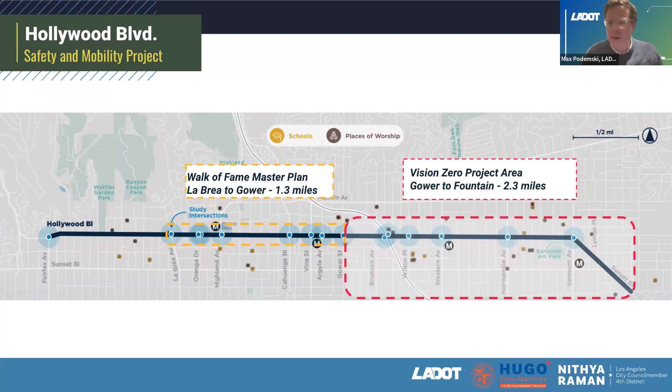So as I mentioned, Hollywood Boulevard was designated one of our priority corridors in 2019. And beginning that year, we started installing initial safety improvements. This project began in August of 2023. And since then, we've been out in the community performing outreach, which has culminated in tonight's town hall, where we're going to show a conceptual design for the street.

And then moving forward, we are going to continue to collect feedback on this conceptual design. And in the summer, our goal is to share a final design and then prepare the community for implementation.

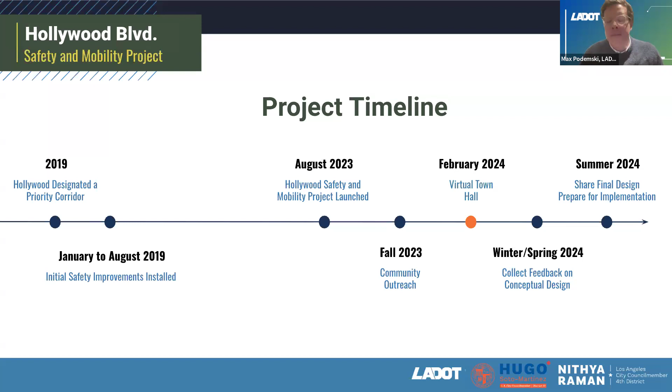So the reason we're focusing on Hollywood and focusing on this project is because there's been a high rate of people being killed or severely injured from traffic crashes. About 56 people killed or severely injured between 2010 and 2019. And as many of you know, Hollywood is a very dense and congested street. There's lots of pedestrians, there's lots of cyclists, there's lots of transit riders, and there's also lots of vehicles, and many of these vehicles are going at high rates of speed.

So between Normandie and Kingsley, about 30% of cars are exceeding the speed limit. And that combination really results in a high degree of people getting killed or severely injured, and about 60% of those killed or severely injured between 2010 and 2019 were either walking or biking.

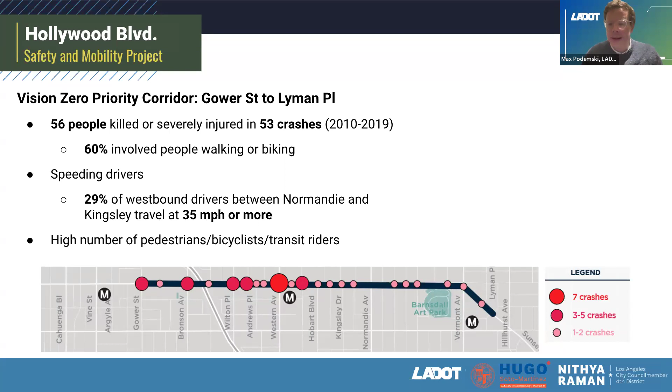As I mentioned, we have installed some initial safety improvements on Hollywood. This includes continental crosswalks, left turn calming treatments, and we also installed rapid flashing beacons at several intersections. These are flashing yellow lights that help pedestrians cross the street.

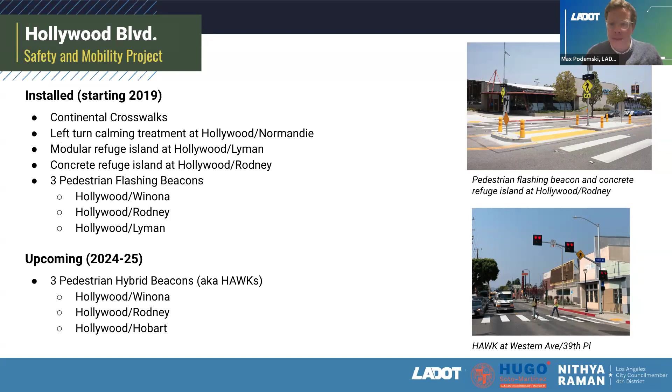We have some upcoming improvements coming later this year or early next year, which involve upgrading those rapid flashing beacons to hawk signals. So instead of a flashing yellow light, there will be a red light that will flash.

We have 5 main project goals for this initiative. First and foremost, we want to improve traffic safety and reduce fatalities and severe injuries caused by car crashes. We also want to enhance connectivity to jobs, social services, and transit. We want to support sustainable modes of transportation, such as biking and walking, increase access to the Metro B line stations along the corridor, and complement the future redesign of Hollywood Walk of Fame, creating a cohesive corridor all along Hollywood Boulevard.

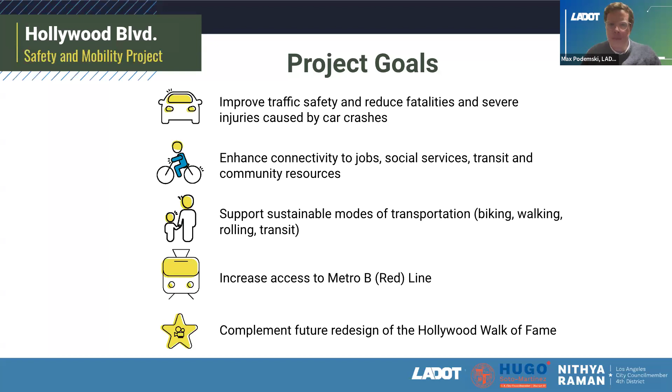Hollywood Boulevard is extremely diverse, and to engage all of the different constituencies along it, we used a multi-pronged outreach strategy.

This involved sending mailers to 20,000 homes and businesses within a quarter mile of the corridor, so every home and business near the corridor received a mailer. We launched a social media campaign that had 60,000 unique views, and we created an email list with 2,000 addresses that we sent project information to.

We also posted informational posters about the project along the corridor and in Central Hollywood in English, Spanish, Thai, and Armenian.

All of this marketing directed people to our website where they could learn more about the project, and also fill out a survey to give us information about how they currently use Hollywood and safety issues. We ended up receiving nearly 2,000 responses to this survey, which is one of the largest amounts for any LADOT project so far.

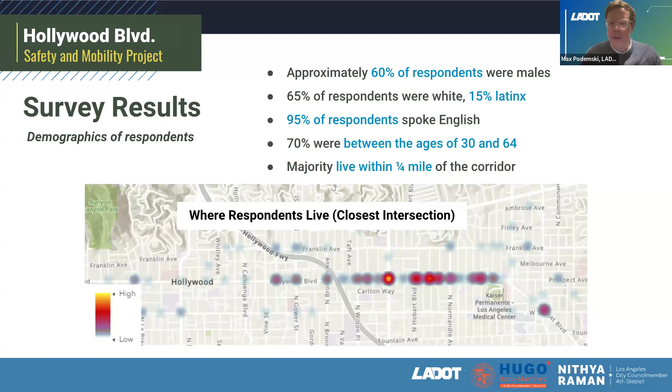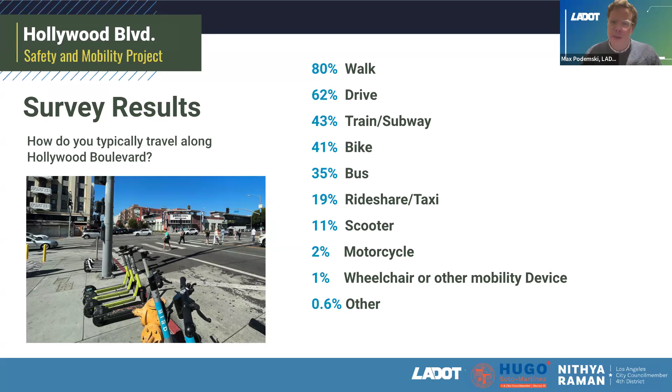We also asked people how they currently get around on Hollywood Boulevard, and similar to the survey we did tonight, people use lots of different modes. People were able to mark every type of mode that they used. The most popular was walking, similar to tonight. The third most popular was using the train or subway, fourth most popular was biking, and driving came in second.

We also asked people about safety issues along Hollywood Boulevard, and about 90% of respondents said that improving safety on Hollywood is very important to them. One of the main reasons they cited for Hollywood being unsafe is the high rate of speed that vehicles travel along the corridor, and 60% also said that a lack of bike facilities make them feel unsafe.

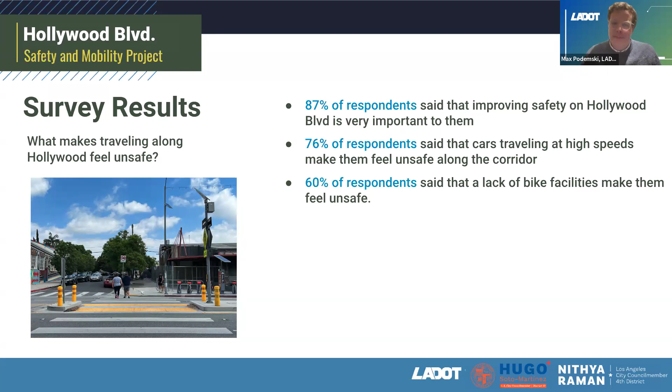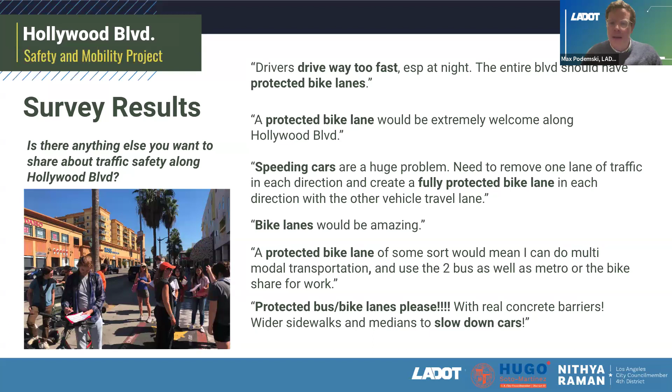We also had a portion of the survey where people could write in general comments or feedback about safety. As you can see, we received lots of comments with people requesting protected bike lanes and citing the high speeds of vehicles along the street.

These are some other representative comments that we heard. People cited scooters, either riding on the sidewalk or blocking the sidewalk and creating a hazard. People also brought up homeless encampments and street vendors, which is not an issue that we are going to address as part of this project.

This comment in the middle sort of summarizes a popular sentiment we heard, which is that Hollywood is already a really great destination. There are so many great stores, restaurants, and community facilities, and improving safety could really enhance it as a centerpiece of LA and make it an even more special destination for people.

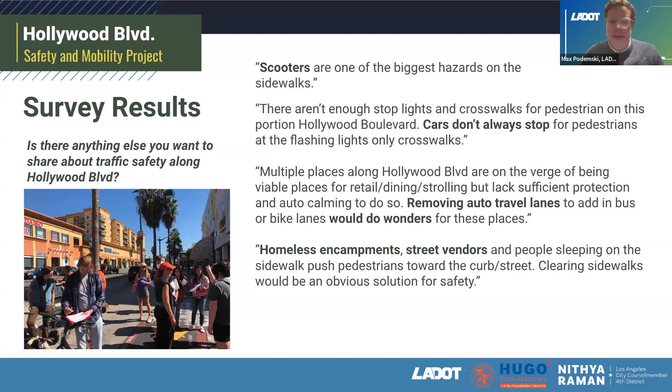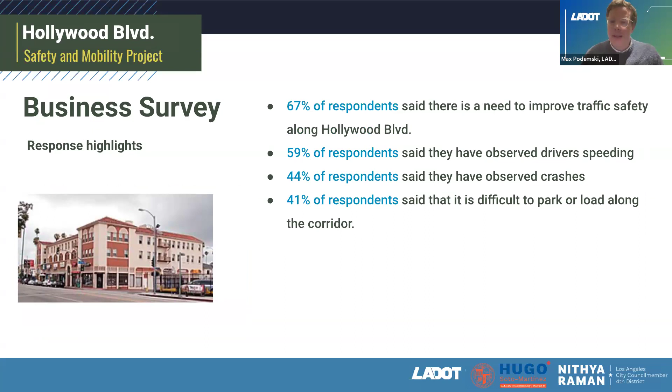We also asked business owners about safety. 70% said that improving safety on Hollywood is important to them. Again, speeding came up as one of the main issues of why Hollywood is unsafe, and nearly half of businesses said that they've observed crashes on Hollywood.

We also had a section on the business survey where we allowed businesses to write in general feedback on safety along Hollywood. These are some representative quotes. Again, homelessness came up as an issue, which is not something we are dealing with as part of this project, but we also heard a lot of feedback on needing enhanced pedestrian crossings and more pedestrian crossings. Many respondents actually listed places where they would like to see enhanced crossings, and you might remember from earlier in the presentation, some of these intersections will get upgrades very soon.

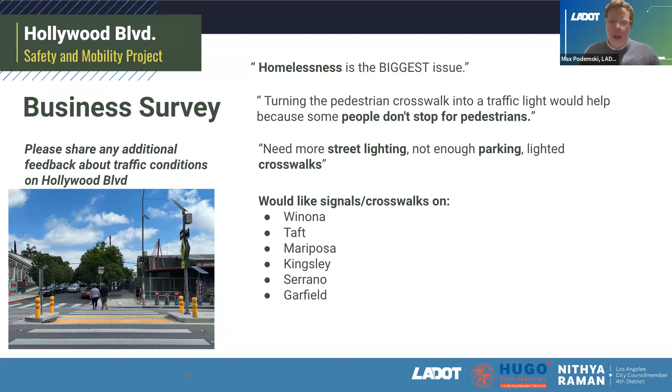So all this feedback we received from our outreach, we have been compiling it and using it to create a conceptual design, which Matt is going to present to you now.

Thank you, Max. Hi, everyone. My name is Matt Gertz. I'm a transportation planner here at LADOT on our Vision Zero team. So like Max said, we got a lot of great feedback from all the outreach we've done, and now I'm going to detail the conceptual design that we've developed.

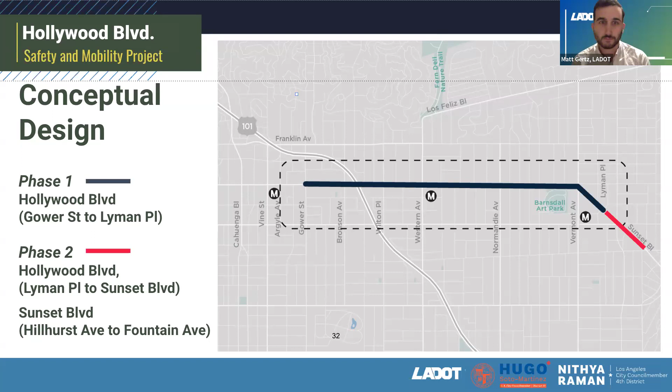Just at the outset, we'll be upgrading the pedestrian crossings that Max mentioned earlier into HAWK beacons for some extra comfort for pedestrians crossing the street.

And based on a lot of the feedback that we heard, we are recommending protected bike lanes next to the curb for Hollywood Boulevard, which would also involve moving the parking lane to the left of the bike lane, and then adding a left turn lane where there currently is none. This would also involve reducing the number of travel lanes or parking in some situations.

We'll also be looking at installing additional left turn calming treatments and identifying opportunities to install speed tables on Hollywood. The picture you can see here is of a similar lane reconfiguration project that we installed on Avalon Boulevard in South LA just a few years ago.

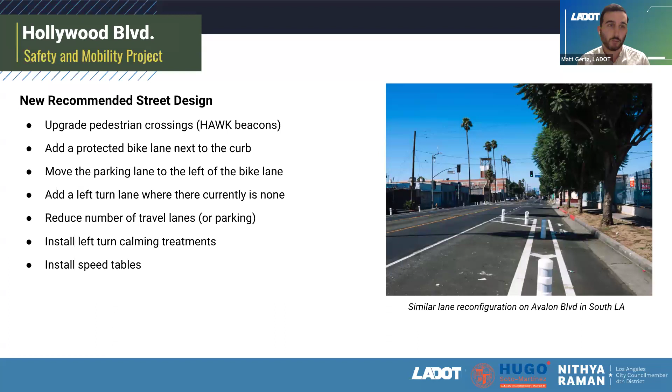I'm going to go from east to west and describe the existing street design and then talk about our proposed design. Between Vermont Avenue and Lyman on the eastern section, which is our widest section of Hollywood Boulevard, we have 2 lanes in each direction, 1 center turn lane, and on-street parking. Our project design proposes to add protected bike lanes next to the curb, shift the parking lane to the left of the bike lane with the buffer, and remove 1 vehicle lane in each direction.

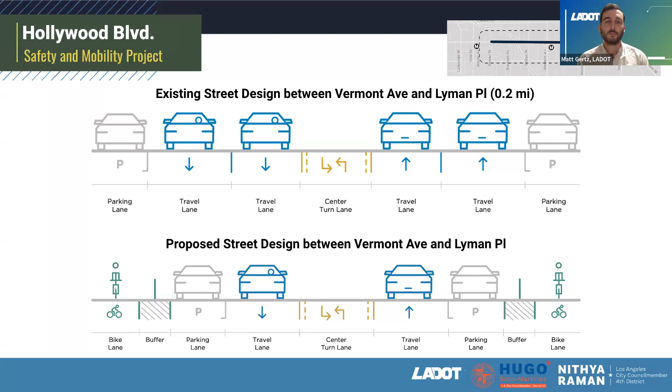For our biggest cross section, which is between Van Ness Avenue and Vermont Avenue, there are currently 2 vehicle lanes in each direction with on-street parking on each side. Our proposal would be to remove 1 lane in each direction here, install that center left turn lane, and again add the protected bike lanes and shift the parking away from the curb.

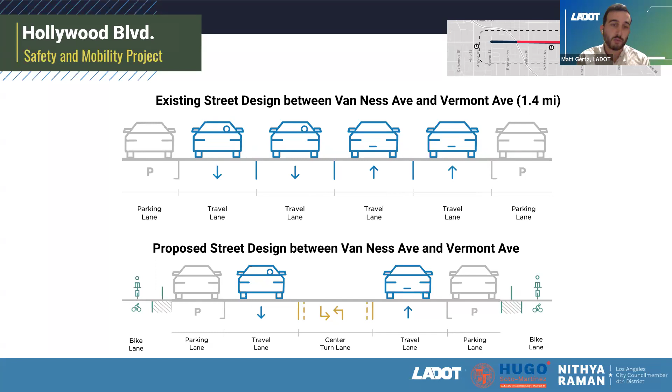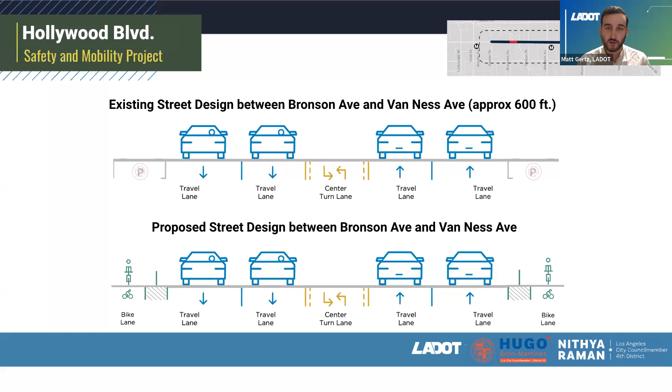As we approach the 101 freeway, we have 2 vehicle lanes in each direction with a center turn lane as well, with some parking restrictions. In order to maintain access to the freeway and comply with some more complicated on-ramp design, we'll be maintaining those 2 vehicle lanes in each direction, but also using the additional space with the parking restrictions to continue the bike lanes through this area.

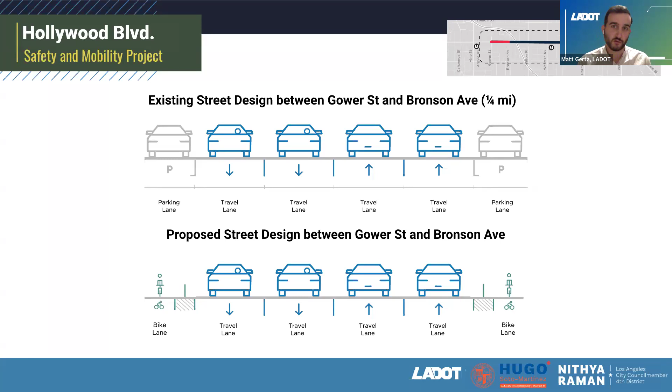And last but not least, as we approach Gower Street, we will also be maintaining the 2 vehicle lanes in each direction, but in order to continue the bike lanes through this area, our proposal is to remove the existing on-street parking and install protected bike lanes in this area as well, which would also allow for a connection to the future Hollywood Walk of Fame redesign project.

So the benefits of our conceptual design: we've seen that lane reconfigurations like this reduce excessive speeding, and we know that speed kills. So when you get people to drive more slowly, you reduce the risk of people dying or getting severely injured in crashes when they're walking or biking.

When we install this sort of treatment, we reduce the number of travel lanes that people walking need to cross, reducing their exposure to traffic. A lot of the time we see pedestrians trying to cross a 4-lane roadway and a car will stop in the lane closest to the curb, but someone sometimes tries to go around that car and doesn't see the pedestrian, which results in a severe crash. This redesign really cuts down on the likelihood of that type of crash happening.

This design also provides a safe, dedicated space for people on bikes and scooters to ride, and encourages people to switch to riding in the street instead of the sidewalk, which is a benefit for pedestrians as well. It also provides a dedicated space for drivers to make left turns without stopping through traffic, giving them more time to think about making a left turn and being more aware of cross traffic and people crossing the street.

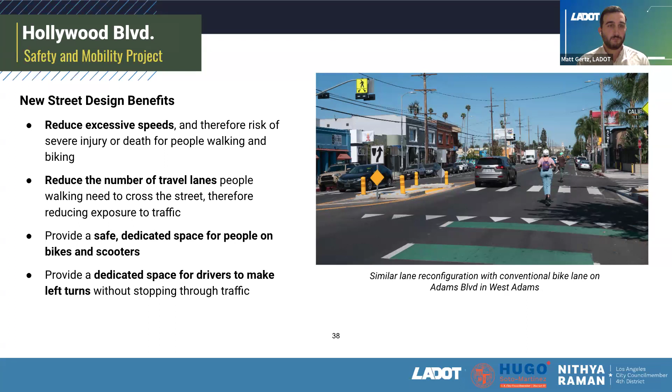We did do a traffic study for this project, and we found that with the removal of the travel lanes in each direction, we would see a maximum of about 2 to 3 minutes of additional vehicle delay per mile. So if you're driving the whole corridor, which is about 2 miles, that factors into about a 5 to 6 minute addition to the vehicle travel time.

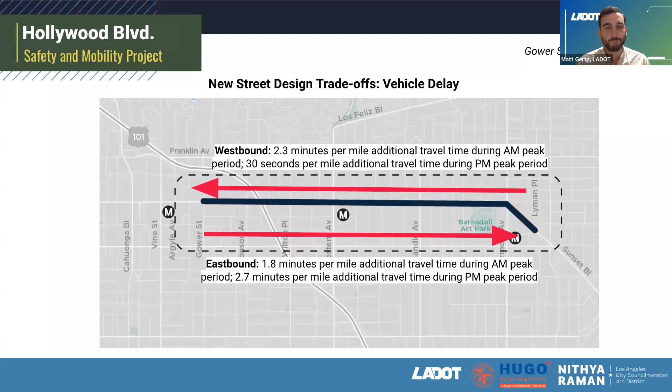As I mentioned earlier, we are looking at removing all of the on-street parking between Bronson and Gower in order to accommodate the bike lanes in that area. In addition, when we install protected bike lanes, we also need to install additional parking restrictions around driveways and intersections to increase visibility of the bike lane for people coming out of driveways.

This would result in about 1 to 2 spaces per block on each side of the street needing to be removed between Van Ness and Lyman due to this need for visibility. You can see here an example on a recent project we installed on Venice Boulevard, where you'd have parking restrictions in advance of the driveway and an intersection.

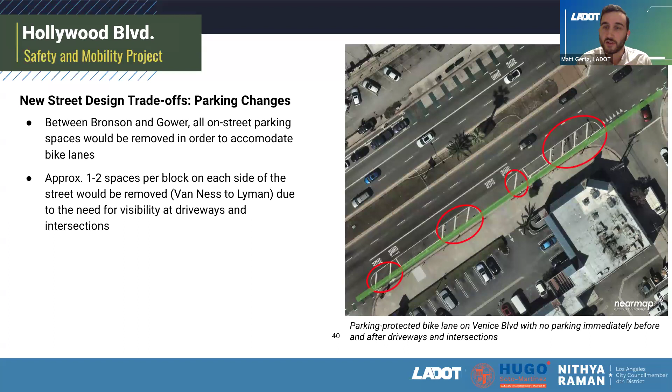We are also looking at some other improvements. We heard a lot of feedback in our outreach about improving the experience at the intersection of Hollywood, Prospect, and Vermont. So we are looking at ways to streamline how people move through this intersection using paint and plastic bollards, increasing the visibility of people biking and walking, slowing down turning drivers, and bringing awareness to how people are moving through this area.

We'll have some more detailed concepts for this area in the next several weeks, and we'll be doing additional outreach to keep people informed.

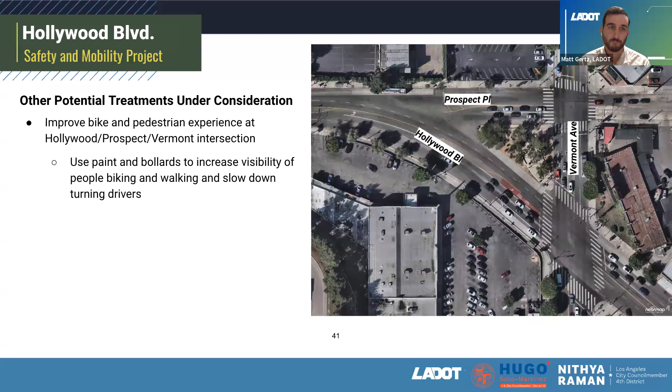A left turn calming treatment adds what's called a hardened center line. It slows down drivers making a left turn and makes them more aware of people in the crosswalk. We're also looking at installing speed tables around pedestrian crossings to reduce speeding and make people more aware of those crossing the street. We are still looking at opportunities for what locations might be suitable for speed tables.

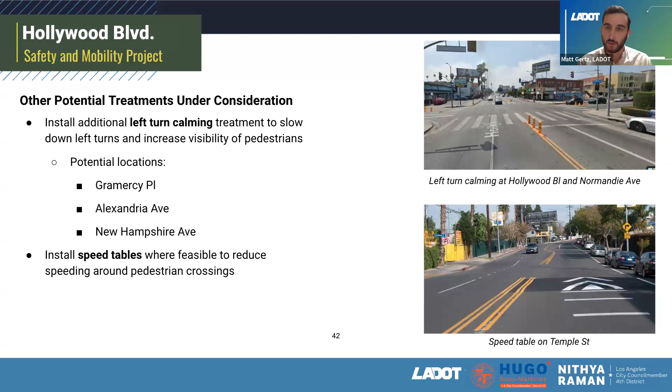So that would be our phase 1, between Gower and Lyman. But we also saw an opportunity to improve the experience for all road users approaching the complex intersection of Sunset Boulevard, Sunset Drive, Hillhurst Avenue, Virgil Avenue, and Hollywood Boulevard, as well as connecting to existing bike infrastructure on Sunset Boulevard. So we are studying possibilities to improve the experience for everyone by reconfiguring this complex intersection.

One of the things we're looking at is limiting access to Sunset Drive. We're also looking at extending the proposed bike lanes on Hollywood to connect to the existing bike lanes on Sunset, to really build additional connections to Silver Lake, Echo Park, and downtown LA.

This concept is just in its early stages, so we will be doing additional outreach to help facilitate our opinions and design choices on this stretch of Hollywood and Sunset. But we are including this as a second phase of this project.

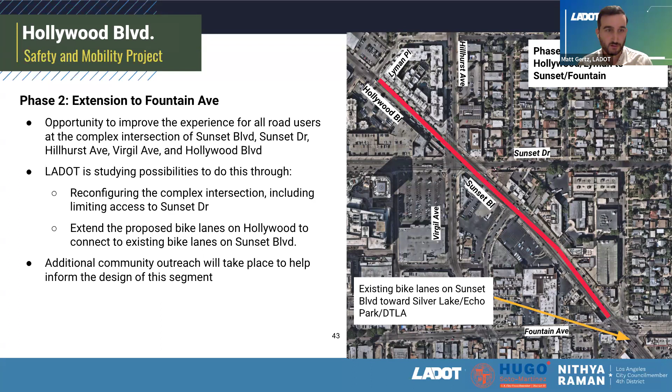We'll prepare a final design, and also coordinate with our partner agency, Streets LA, who is responsible for ensuring the roadway pavement is smooth for implementation. We'll be coordinating with Streets LA to schedule street resurfacing in advance of project implementation. As we get closer to implementation, we'll continue to be out in the community, providing notification about the construction period, any impacts you should be aware of, and the specific timeline. You'll continue to hear from us over the next several months as we move forward with this project.